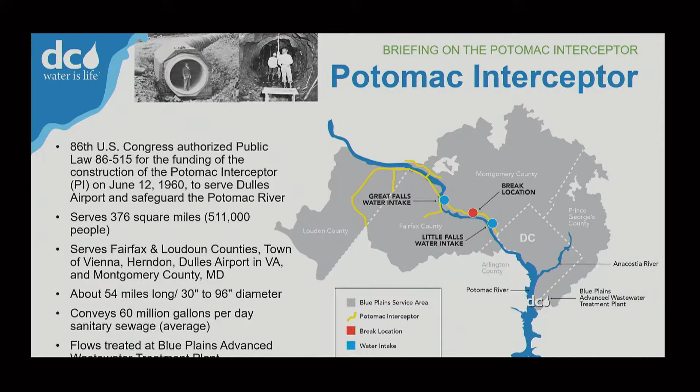The specific location, as you're all aware, is just near the American Legion Bridge. At that section, it's a 72-inch pipe made out of reinforced concrete. So one of the priorities was to keep the Clara Barton Parkway open. It's our lifeline for people and supplies. And the break occurred really close to the Clara Barton Parkway, so we used a technique called supportive excavation to make sure we didn't have any impact on the parkway.

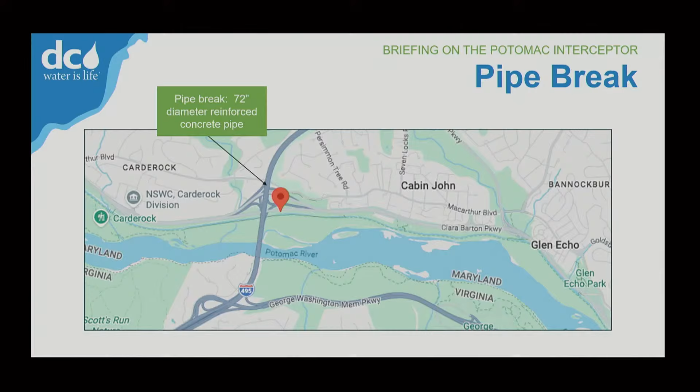So let me start at the beginning and just point out some of the highlights. Obviously, the break occurred on January 19th, Martin Luther King Jr. Day, when we became alerted of movement outside of an odor control facility that we have at that site. The very first priority was to get a bypass in place, meaning taking the flow out of the pipe above the break and putting it back in below the break. We were fortunate to be able to work with the National Park Service to make use of what was the dry C&O Canal, and installed pumps.

The very first pumps were online 5 days later, on January 24th, with 40 MGD, million gallons a day, of pumping capacity. That's when the winter weather happened.

We did have some complications because flushable wipes clogged the pumps. Please don't use those wipes, they're bad for sewer systems, not just for DC Water in this project. Those wipes clogged our pumps, and when that happened, we had to take the pumps out of service.

We brought more pumping capacity online on the 27th, and then we were able to begin excavation. I think last time we talked about the rock dam that we found. During construction of this pipe, it appears large rocks were used as fill, and when the pipe collapsed, all of that fill clogged the pipe, causing the overflow.

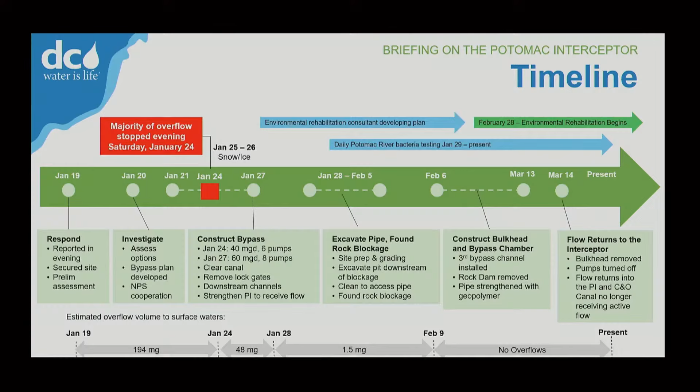Just a couple pictures of the response effort. To the left is one set of the bypass pumps. Those 3 pumps represent 40 million gallons a day of pumping capacity, which took the flow out of the Potomac interceptor.

It was conveyed down through the dry C&O Canal to this cofferdam, and at the cofferdam the flow was channeled back into the Potomac interceptor with the facility you see on the right.

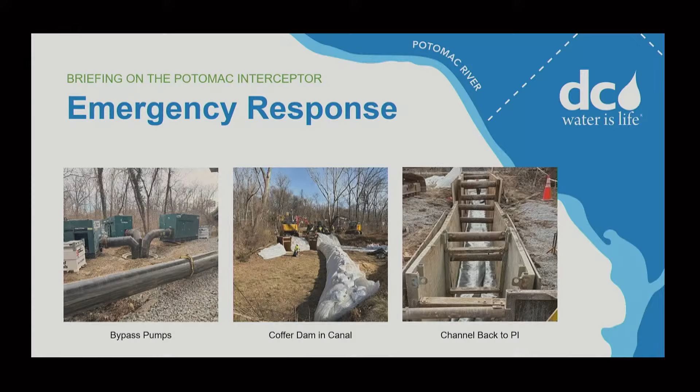This is a picture of some of the rocks that we took out of the broken pipe, and that really complicated the effort and the incident, because those rocks blocked nearly all of the flow.

The repair effort was to strengthen the pipe both upstream and downstream of the break location. You can see on the right what looks like a new pipe - that's a spray concrete-like material that strengthens the pipe, and that allowed the flow to be put back into the Potomac interceptor.

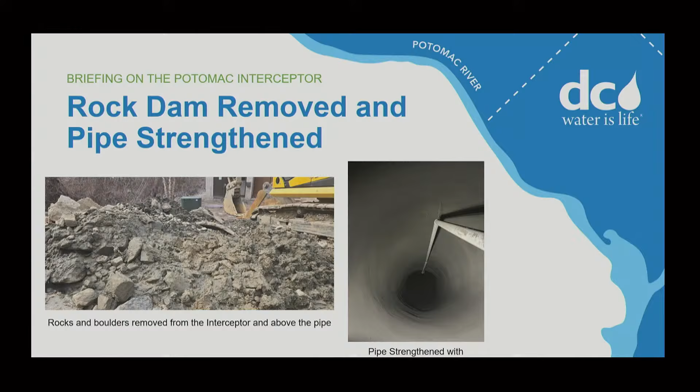This is the location of a bulkhead, and on Saturday we were able to pull the bulkhead out, which restored flow to the pipe. That bulkhead had stopped the flow so that we could excavate and remove the pipe and the rocks.

The area on the right is an open excavation. It's a supportive excavation, and you can see the flow in gray at the very bottom of the pipe. If you go out to the site, you'll see that this is still open, and I want to explain why.

We are going to be transitioning to our capital improvement project. That project was already planned, and we've advanced it. By keeping this section open, we can use it to drop the new sections of pipe in, which is going to expedite the capital improvement project - a method called slip lining.

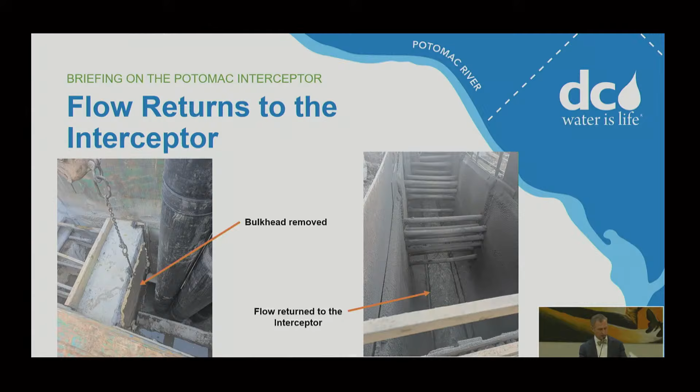It was a big response effort, as you may know. Use of that canal allowed us to avoid nearly 2 billion gallons of overflow that would have otherwise gone to the Potomac River. We've removed 2,300 tons of debris, the equivalent of 1,300 cars.

We filled a lot of bags of rags, enough to fill a home swimming pool, from the pumps. There were also a lot of equipment and materials delivered to the site, 35 tons of gravel, and a lot of fuel to keep those pumps operational.

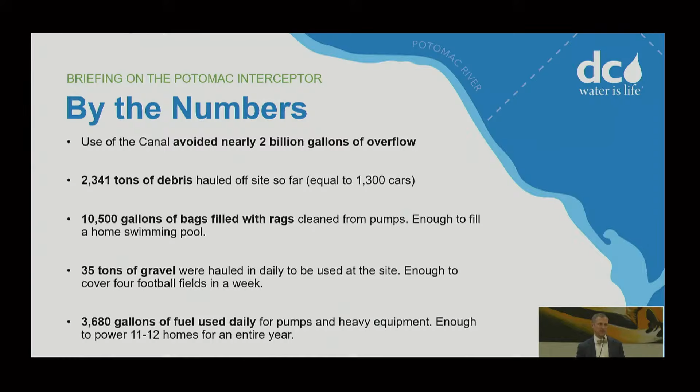The fuel was delivered daily. It was a big, huge effort, and we're really pleased that we were able to put the flow back in the pipe on Saturday. With that, I'm going to turn it over to Amanda Zander, who will talk a little bit about our environmental efforts.

Just to give everybody a quick update on where we are in terms of monitoring and rehabilitation - hopefully you're seeing every day, whether on our website or on DOEE's website compiling monitoring from multiple agencies, that we've been posting our water quality monitoring results. We have sampling that occurs daily at 10 locations.

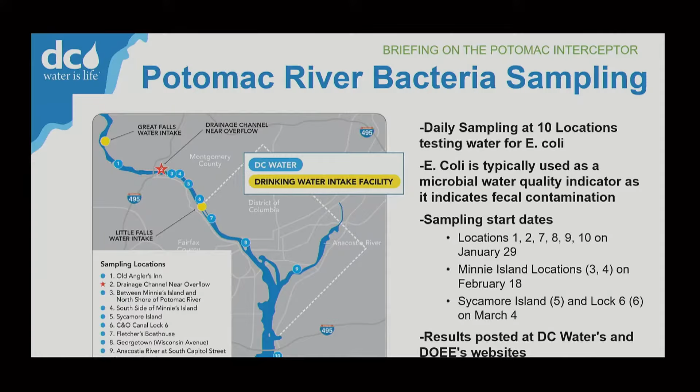We started with 6 locations and added 4 based on feedback we got from all of you, from the community, about the high-use areas we wanted to monitor. So we monitor every day for E. coli, and we post our results. This is just a snapshot of what we're seeing in March.

We talked a little bit about this at the last meeting, and we wanted to give an update on where we are with the initial cleanup efforts we've done at the site itself. We broke up the site into 4 different cleanup areas based on where the overflow occurred and then went to the river. One of our first areas is what we call Area 1.

That's the drainage channel along the Clara Barton Parkway. From there, the overflow went down into the culvert that goes under the C&O Canal, and that runs into a tributary that carries it to the Potomac River itself. So those are what we refer to as Areas 1, 2, and 3.

For Area 4, that area is the C&O Canal, which we use as the emergency bypass, so that's another area we've been targeting in this initial cleanup effort also.

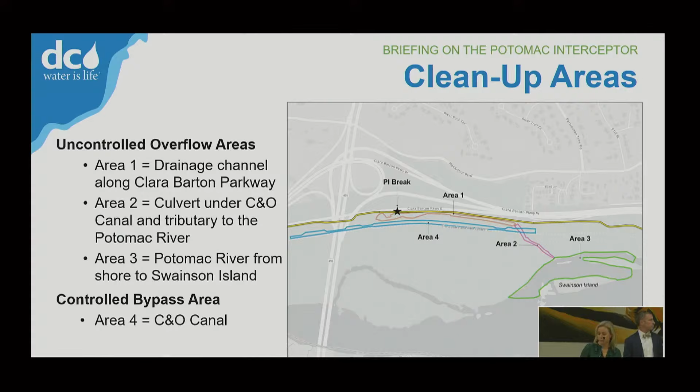This table shows you where we are tonight with our rehab in these initial areas. For Areas 1, 2, and 3, we're basically complete with this initial phase, which is the removal of all the debris and temporary stabilization. We've had multiple partners, federal partners, working with us in these areas.

We've shared the cleanup of Area 1 with EPA, and the U.S. Army Corps of Engineers has taken the cleanup in Areas 2 and 3.

Now that the flow is restored back into the PI, we've actually also started the cleanup in the canal in Area 4. We're working on that now with the initial cleaning and getting the sludge out, and then we'll be continuing on to do the soil removal down to the clay layer, and then inspections and cleaning of the canal and repairs where needed.

In the other areas, we'll be following on. We have EPA doing soil sampling to determine the cleanup impacts in that area, and we'll be looking for their results and guidance in terms of if we have any more work to do before we do the very final stabilization.

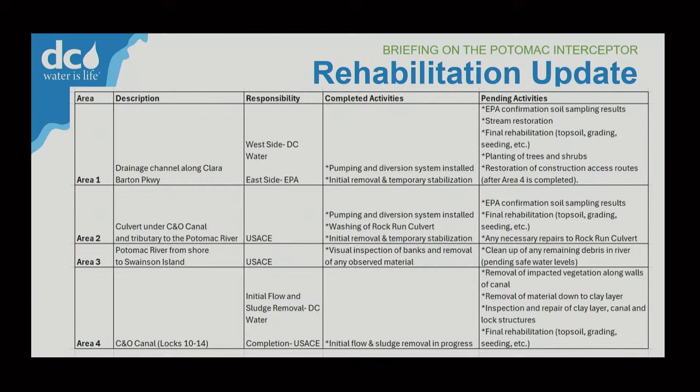That targets basically the exact impact area, which is where we wanted to get in and clean up first, because that was the most impactful area from the overflow. We are working with MDE to assess extending, if we need to, to other locations downstream. So we're working on an impact analysis right now and a comprehensive plan that we'll be submitting to MDE.

One of the things we've done is brought on an environmental expert firm that's going to help us develop that plan and coordinate all the means and methods. One thing we've been hearing over and over, and that we understand is a huge concern from the community, is the sediment, especially in some of these high-use areas and low-flow zones where everyone's going in with their dogs or putting in their kayaks. So one thing we want to do to address those concerns is look at the sediment and evaluate those areas.

As part of this overall comprehensive plan, we're also expediting an initial sediment screening evaluation that we're hoping to get in front of MDE soon, probably in the next week or so, and determine the exact appropriate locations and means and methods for that work.

Just to close out my portion, to give everyone an example of what we've done out there, you can see some photos from Area 1, the drainage channel along the Clara Barton Parkway, and Area 2, the part of the rock run culvert that goes to the tributary where we've been working.

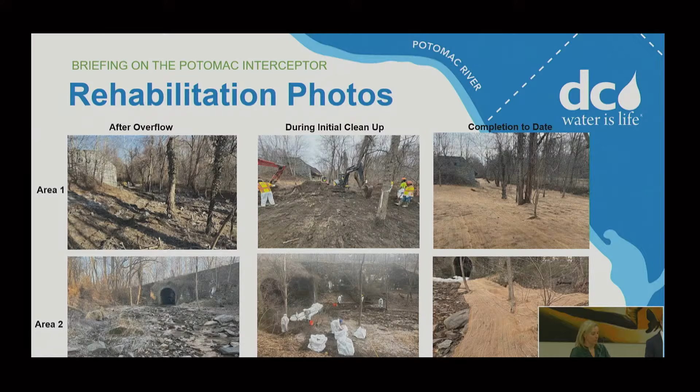There is a lot of work planned in the Potomac Interceptor over the next 10 years. The projects listed here are near-term work. The first two lines were originally a single project of 10,000 linear feet of pipe rehab. We pulled forward a portion of that pipe rehab, and that's what we're using those open channels for, in order to lower the new pipe sections, the slip lining process, into place. We're working to start that in the spring. That's a $30 million effort addressing 2,700 linear feet of pipe near the break location.

We're also working on the next section, the additional 7,300 linear feet that will take us to the full 10,000. That project is slated to start in the spring. We have additional projects, one at Broad Run in Fairfax, and one at Cabin John near manhole 4252. We number all of the manholes. Various methods will be used to strengthen the pipe.

A combination of geopolymer, which is the application I talked about earlier, as well as slip lining, depending on the location. Last time we were here, we also mentioned that we're doing a reinspection of the entire pipe. We prioritize certain locations, and we're also doing a complete inspection. That could lead to reordering of projects or new projects. As we find conditions, we will address them and reorder our CIP as necessary.

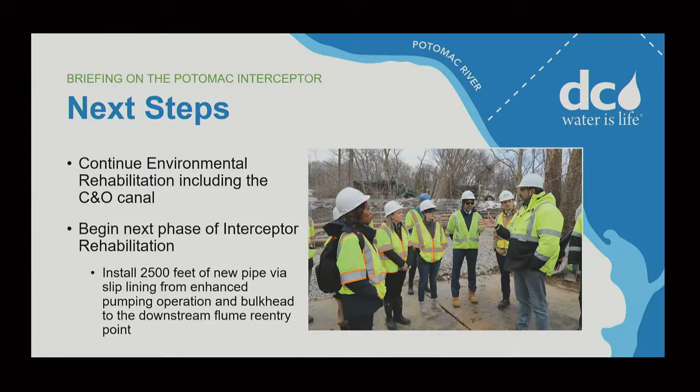Thank you, Matt. I know we're anxious to get to questions, so I'll just be brief. I just wanted to share some notes from the state perspective. It is good to be here. Thank you, Amanda and Matt. Thank you, Mayor. It's always a pleasure and great to be back here. But thank you, everybody, for hanging in and remaining engaged.

We need your feedback. The restoration is a team effort, and all of us are on the team together. Our role at the state is to keep an eye on the restoration when there's potential for impacts to Maryland waters. The Potomac River is a big and important Maryland water, but that also includes all the feeder streams and tributaries that go into the river, and also material on the land that has the potential of going to the river. So we have a big role in the restoration, and as Amanda and Matt referenced, we did provide a letter being very clear about what our expectations are for restoration. They have been very responsive in reviewing the plan and launching the impact analysis. It's hard to know what the right thing to do is if we don't have a good sense of what the actual impact is on the water and the land, and they've been very responsive.

I just want to say I'm joined tonight by our Assistant Secretary. I'm the Deputy Secretary, our Assistant Secretary—I don't know why they picked those adjectives per se—but our Assistant Secretary, Zach Schaefer, who was with me at EPA and comes from the Office of Water and is an expert in that field, and Lisa Jones, who's with our Communications and Outreach team, who's here.